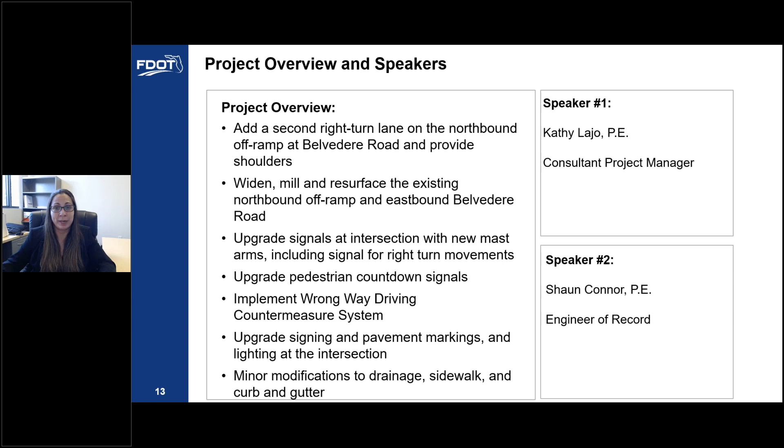Thank you, Nanette, and good evening, everyone. My name is Kathy Lajo, and I am the consultant project manager for this project. The purpose of this project is to enhance traffic operations and alleviate congestion currently experienced at the State Road 9 I-95 northbound exit ramp approaching Belvedere Road. This project is located a little over a mile east of the Palm Beach International Airport, and the proposed improvements are intended to add capacity and storage for the right turn movement onto eastbound Belvedere Road.

Improvements include adding a second right turn lane on the northbound off-ramp, and providing shoulders. We will be widening, milling, and resurfacing the existing northbound off-ramp and eastbound Belvedere Road. We will provide new mast arm assembly and pedestrian countdown signals, so there'll be an improved signalized intersection. We will also be implementing wrong-way driving countermeasures on the off-ramp. In addition, upgrades of signing and pavement marking, and lighting to LED will be part of the project, along with minor modifications to drainage, sidewalk, and curb and gutter impacted along eastbound Belvedere Road to accommodate the second right turn lane.

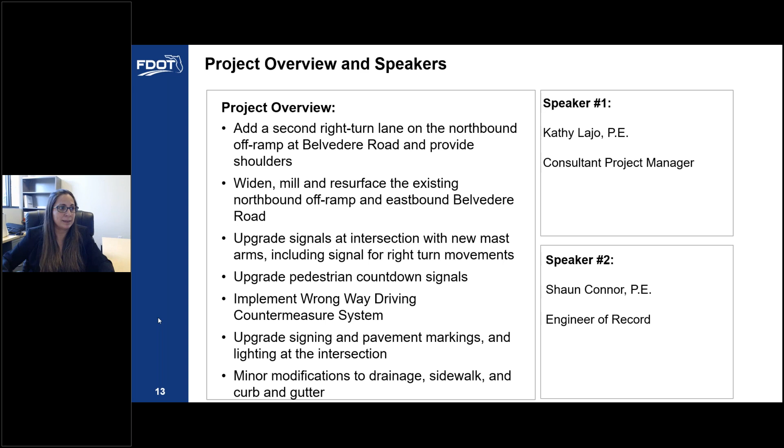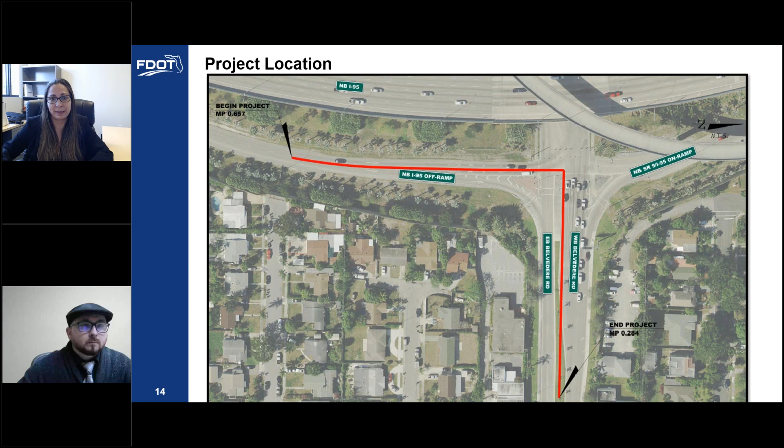To give you further information on the project scope and traffic control information is our engineer of record, Mr. Shaun Connor. Thank you, Kathy.

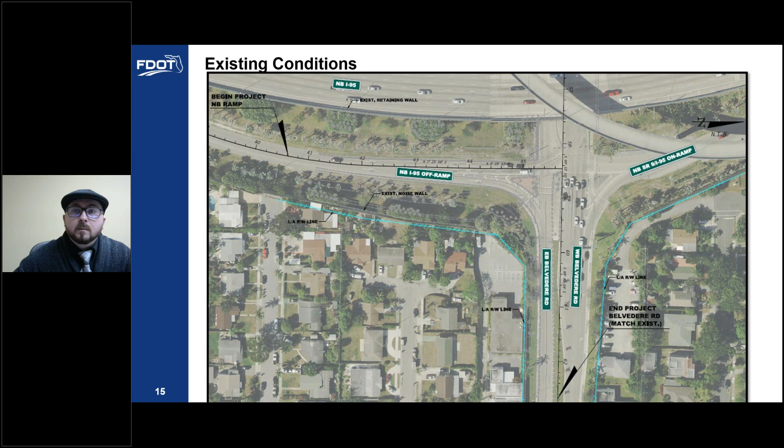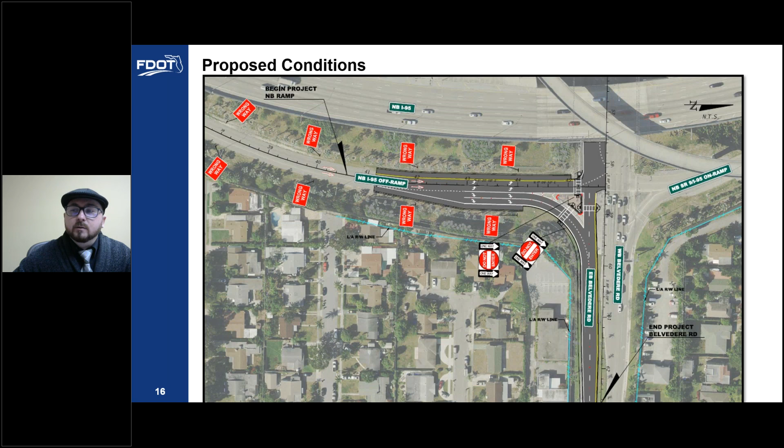Additionally, you can see new wrong-way signs and wrong-way arrows placed along the northbound ramp. These are being provided as an added safety feature to limit potential hazards caused by wrong-way traffic. Please switch to slide 17.

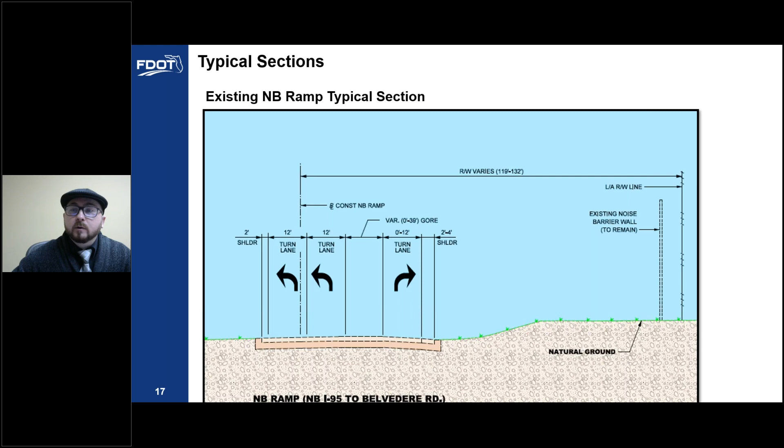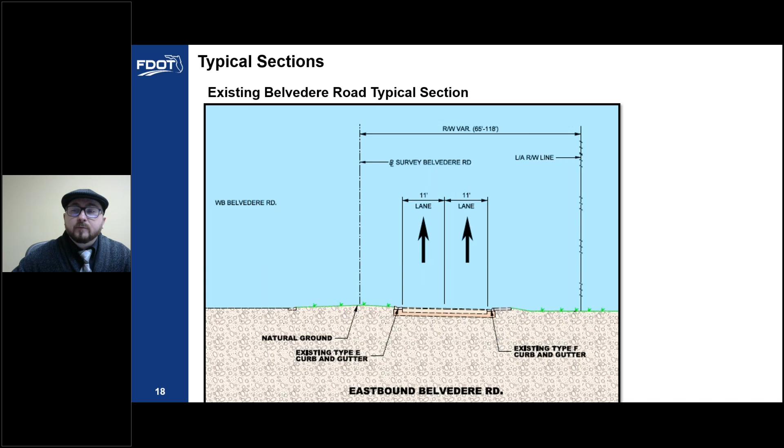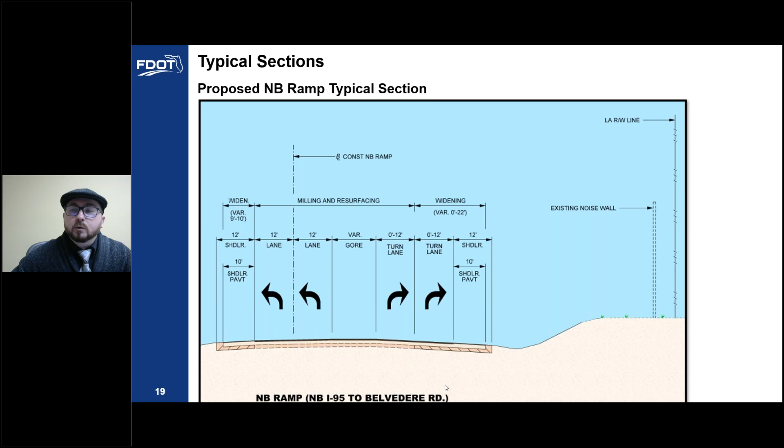Please switch to slide 19. This slide provides the proposed typical section for the work along the northbound ramp, from the start of the ramp to the intersection with Belvedere Road. From left to right: a 12-foot shoulder, 10-foot paved, 2 12-foot left turn lanes, a variable gore, 2 0 to 12-foot right turn lanes, and a 12-foot shoulder, 10-foot paved, on the right-hand side.

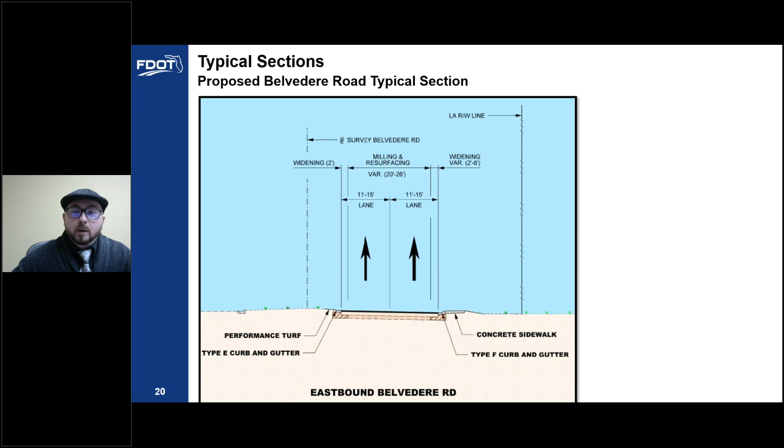Please switch to slide 20. Here's the proposed typical section for the work along eastbound Belvedere Road. From left to right are a new Type E curb and gutter, 2 11 to 15-foot travel lanes, a Type F curb and gutter, and a 6-foot concrete sidewalk.

Please switch to slide 21. Here you can see the proposed traffic control typical sections. The construction along the project will be divided into 4 separate phases. On this slide, you can see the maintenance of traffic on the northbound ramp during phase 1. During this phase, there will be widening and other improvements on the west side of the northbound ramp. A 12-foot left turn lane and a 0 to 12-foot right turn lane will be maintained during this phase.

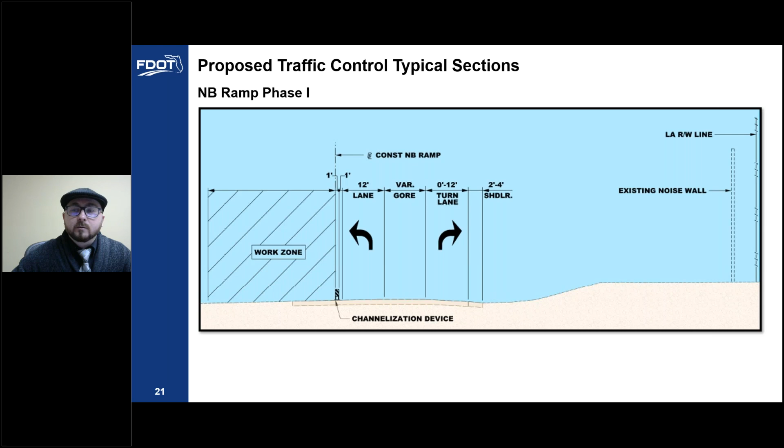Please switch to slide 22. On this slide, you can see the maintenance of traffic on the northbound ramp during phase 2. During this phase, there will be widening and other improvements on the east side of the northbound ramp. 2 12-foot left turn lanes and a 0 to 12-foot right turn lane will be maintained during this phase.

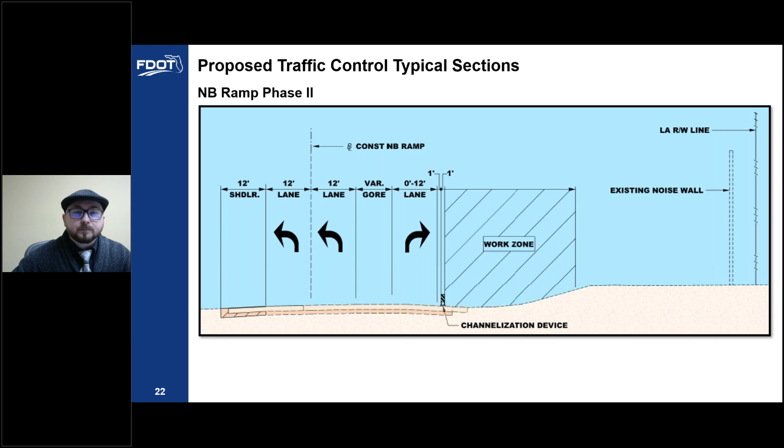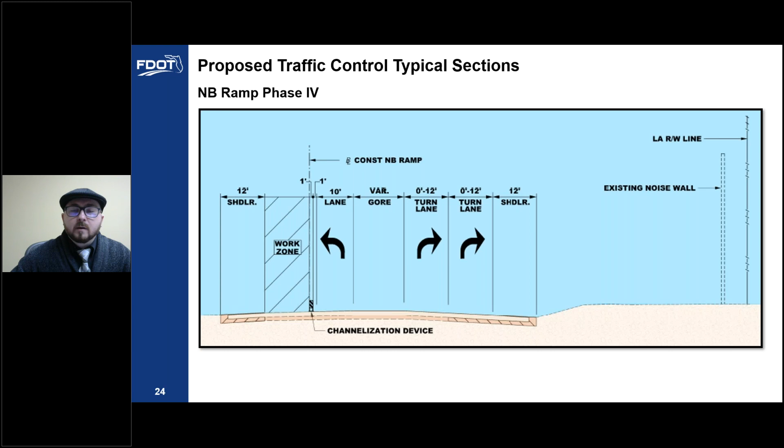Please switch to slide 24. On this slide, you can see the maintenance of traffic on the northbound ramp during phase 4. During this phase, there will be milling and resurfacing within the existing inside left-hand turn lane along the northbound ramp. A 10-foot left turn lane and 2 0 to 12-foot right-hand turn lanes will be maintained during this phase.

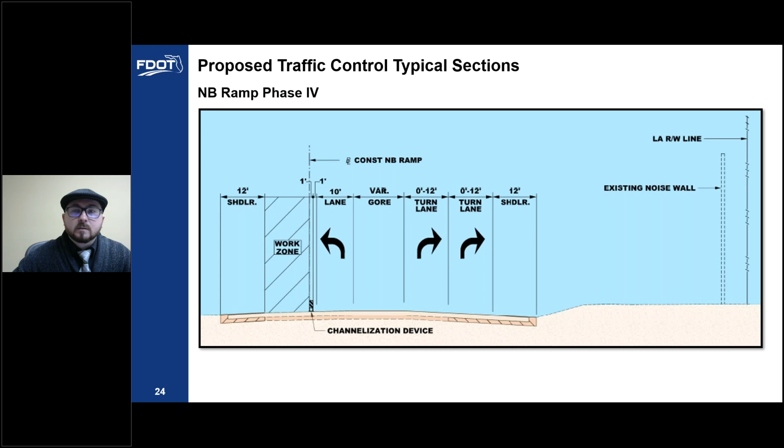Please switch to slide 25. On this slide, you can see the maintenance of traffic on eastbound Belvedere Road during phase 1. During this phase, there will be widening, milling, resurfacing, and other improvements on the existing inside lane and median along Belvedere Road. A 10-foot through lane will be maintained during this phase.

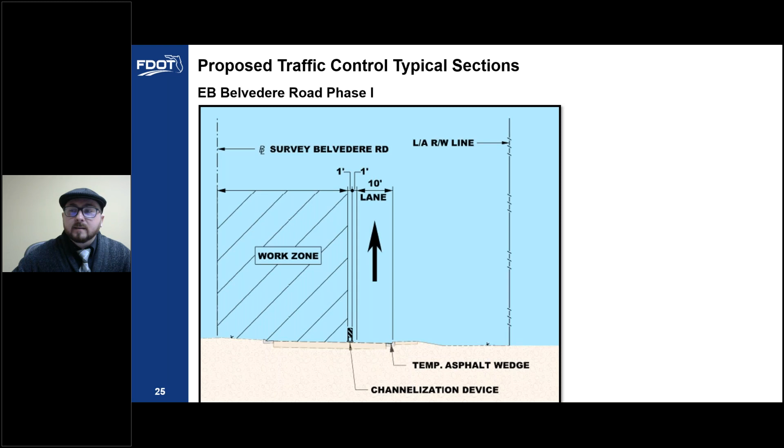Please switch to slide 26. On this slide, you can see phase 2 of construction along eastbound Belvedere Road. During this phase, there will be widening, milling, and resurfacing and other improvements on the south side of Belvedere Road. A 10 to 14-foot through lane will be maintained during this phase.

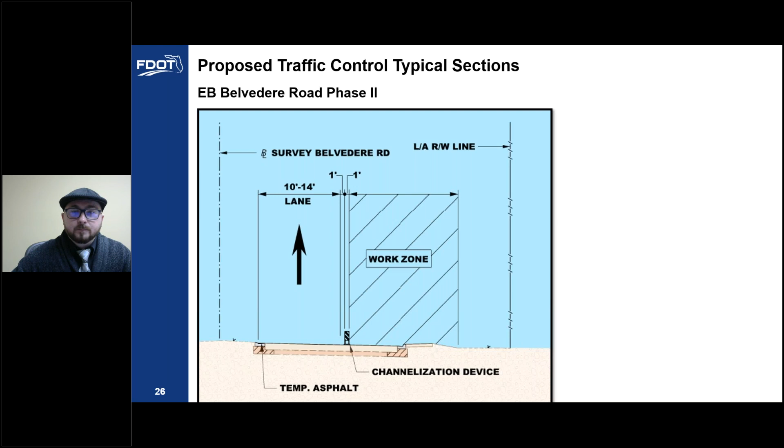Please switch over to slide 27, where I'll turn it to Kathy Lahu.

Thanks, John. On this slide, you'll see our project schedule and costs, and we'll share some of the project milestones. The project letting is scheduled for July 27, 2022, and construction is scheduled to begin fall of 2022 with an anticipated end date of winter 2023. The construction cost for this project is $2.2 million.

And with that, we've presented the proposed improvements today, which, as we mentioned, will alleviate the congestion at that intersection and improve capacity as well as storage for the right turn movement.

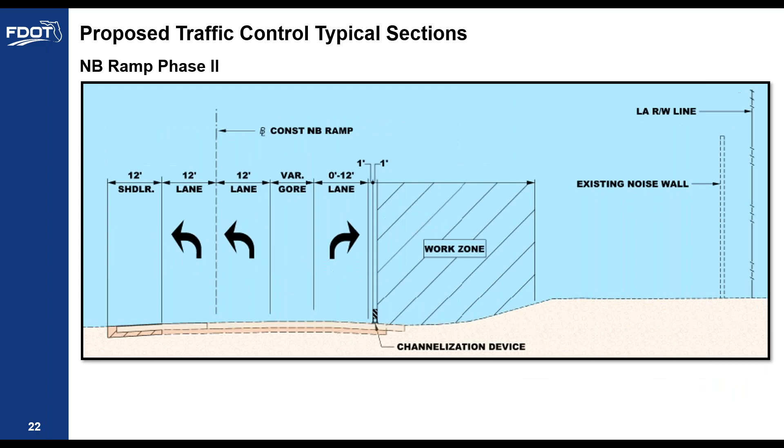So there are some trees along the northbound exit ramp close to the shoulder that's being widened, and due to those proposed improvements, they need to be set back. On the west side of the northbound ramp, we also have some trees that will be relocated and set back. In the median of eastbound Belvedere Road, there are a few trees that, because of the reconfiguration needed to accept the right turn lane, will have some relocation, but within the same median.

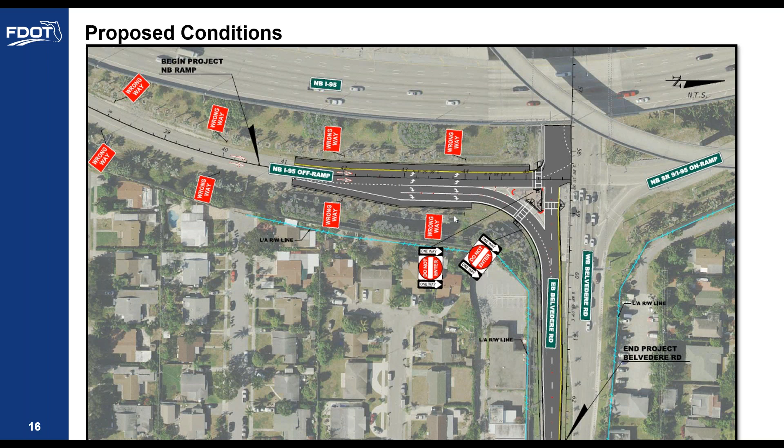Thank you, Kathy. Does that answer your question? And we have another question from the same person: the maintenance has not been occurring, the vegetation is overgrown, and the stormwater ponds are green and nasty.

Okay, right now this area is maintained by the City of West Palm Beach. So the existing maintenance agreement that the department has with them would be in effect for the same landscape, the existing landscape, and the relocated trees that are out there now. So I will bring up your concern to the department to coordinate, and also coordinate with the City of West Palm Beach, who is responsible for maintenance of this area.